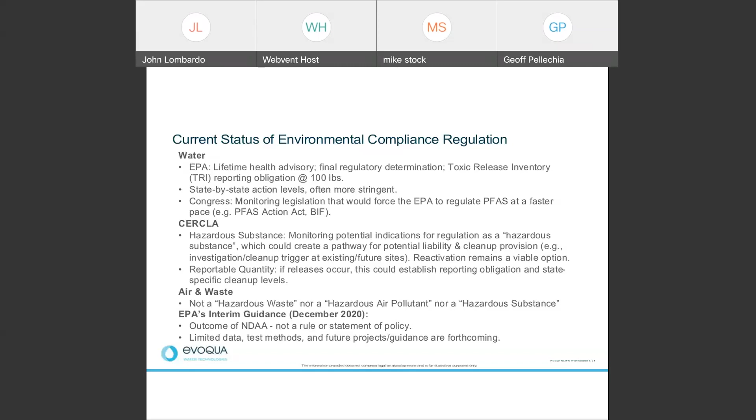All of these can contribute through exposure routes like occupational exposure, the drinking water, atmospheric transport to contaminated food products, which over time can contribute to adverse health effects. One of the largest studies conducted for PFAS was the C8 health study in 2005 to 2006. This study looked at human blood serum and was performed on a population of about 70,000 people who were affected by contaminated drinking water that had PFOA, or better known as C8. The study focused on 6 water districts across 2 states.

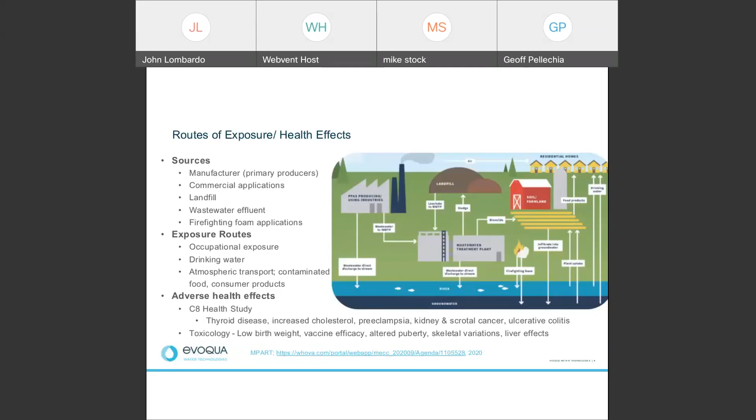So now I'm going to pass it over to John Lombardo, and he's going to discuss solutions and then show some case studies. Thank you, Geoff. My name is John Lombardo. I'll be covering, as Geoff said, some solutions and case studies on PFAS as we go forward.

So as you see now, there are different methods for removal solutions, right? So there's basically classifications of separation, which would be our granular activated carbon or granular activated carbon in general, and ion exchange, which separates the PFAS from the water. They're capture. They actually capture it and adsorb it. Membranes are separation, which physically separates it.

So in the case of membranes, you get basically an effluent stream or a permeate stream and a concentrate stream. The permeate stream is contaminant free for the most part, or is much lower in contaminant concentrations. And the concentrate stream is actually highly concentrated now with those contaminants. That's the separation piece of it. Carbon and ion exchange are basically adsorption or capture. They both work on the adsorption principle.

Granular activated carbon is named best available technology by EPA for organic contaminant removal. It does remove other organic contaminants as well as PFAS, so it's very good at removing halogenated compounds from water, PCE, TCE. It's good at removing other things, maybe from gasoline that's gotten spilled in the soil as well. It's a very minimal maintenance operation. There's not a lot of moving parts. It's just a flow through, pump and treat, if you will.

Single pass ion exchange uses a resin bead, a plastic resin bead, to accomplish the same thing. It's actually a combination of adsorption and exchange. It runs at a lower empty bed contact time, EBCT, than granular activated carbon. For carbon, the industry standard is about 10 minutes of empty bed contact time. For ion exchange resin, it's typically in the 2 to 3 minute range. So you can run it at a higher flow rate, and usually it requires a smaller footprint

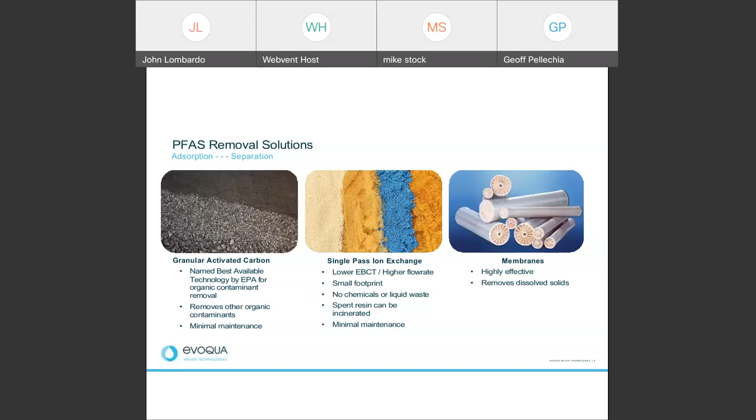So how does granular activated carbon work, or why does granular activated carbon work? Granular activated carbon is really a very highly porous media which has a tremendous surface area. About 1 teaspoonful has enough flat surface area to cover a football field if you could spread it out. So remember, that's just a flat surface. There's really no depth measurement in there, but on a square footage. So it's an extremely porous and highly surface covered area.

And in the diagram you can see on the top right, which is a depiction of a granular activated carbon grain, there are basically 3 types of pores. There are macropores, which are the largest pores. Then there are mesopores, which are the medium pores. And then there are micropores, which are the smallest pores. Well, adsorption takes place in the micropore zone of the carbon.

So the contaminants that you can see there in the green and the other, I'll say purpley red ones, work their way through the macroporous structure of the carbon, then transport using the mesopores down to the micropores. So the contaminants are then stored in the micropore section of the carbon.

So all carbon is not created equal. It all depends upon really the raw material and the activation process. The performance is determined by the porosity and what we call the surface chemistry. The best thing is to know that on an individual water source, you are matching the best type of carbon for that particular solution. Some carbons are more microporous, some carbons are more meso or macroporous. So knowing what is in your water really is the best way to determine the best type of carbon. There's really not a one-size-fits-all approach in this type of operation.

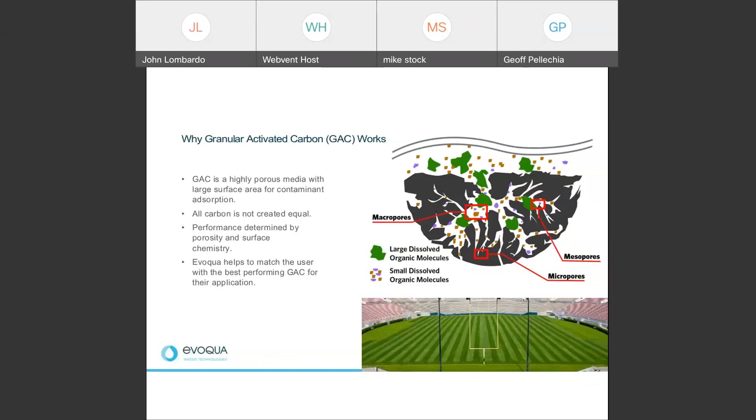So how does ion exchange work?

So ion exchange is in essence a plastic resin bead, and it's based on the principle of exchanging a harmless ion for the contaminant. So if anybody is familiar with softeners for home, where you're exchanging calcium and maybe magnesium for sodium, that's the same type of principle, but it also works on adsorption. So after the contaminant, kind of the green globules that are there in the diagram, are exchanged on the surface of the ion exchange, it absorbs into the structure. And in this process, we're exchanging chloride as the ion exchange for the contaminant.

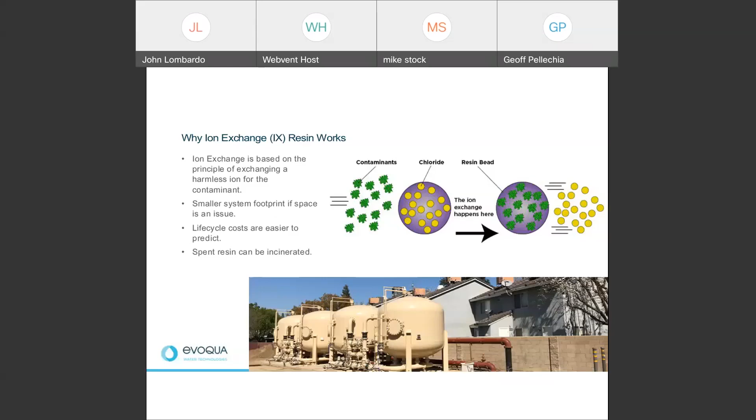It requires a smaller footprint, so if space is an issue, ion exchange may be a more attractive option. The life cycle costs are a little bit easier to predict, whereas carbon is a grain, really. It has a very rough look to it. The resin beads, in this case the ones that we use, are relatively uniform in particle size, so it's pretty easy to predict absorption and different things. And the spent resin, once exhausted, can be sent off for incineration.

And they're a good measure because they take into account seasonality, fluctuations, and different things that go on. So if you have a surface water, which is prone to turnover, whether it be lake water, pond water, or any type of surface stream or river that you're drawing from, piloting is a good way to take into account seasonality. As leaves fall, if you're in the northern part of the country, they fall into the water, and you have animals, runoff, rain that collects in there. It might be a better option for you.

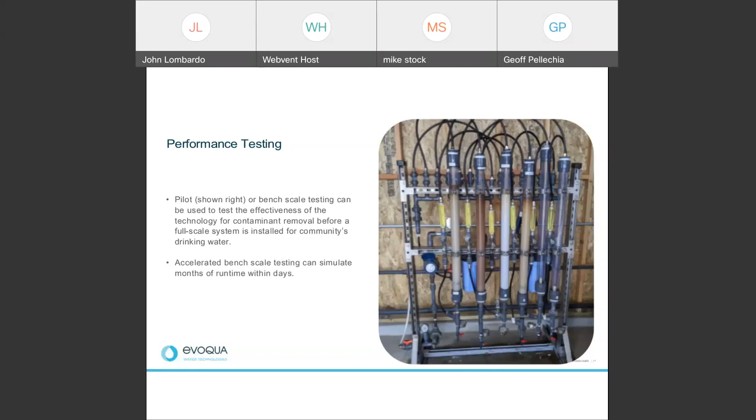The one disadvantage of the RSSCT is that it's a snapshot in time. You're taking a sample, usually a drum of water, so a 55-gallon sample, and using that as your basis. Now, if you have a groundwater source that's pretty stable, then it's a pretty safe assumption. So there are pros and cons on each one: length of time, testing, cost, availability, other things. This all goes into determining the best way for the municipality, utility, or whoever the user is to benchmark their performance and what they would expect in a full-scale system.

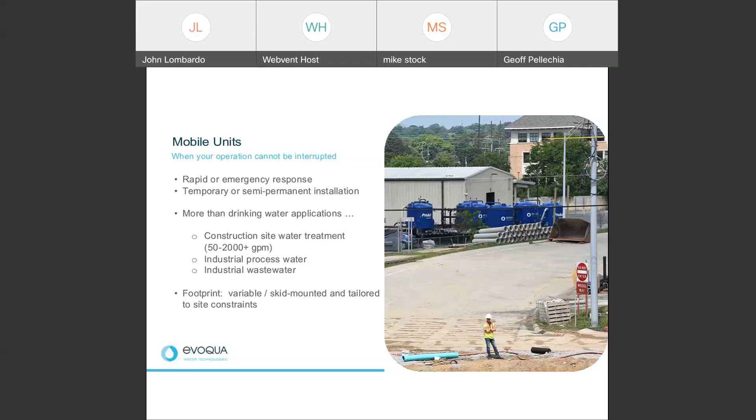It can be done for industrial process water and industrial wastewater as well. There are variable footprints based on size and constraints, and some of the equipment may be skid mounted or trailer mounted to make it easier for you to operate on your site.

Now I'm going to cover some case studies. The first case study that I'm going to cover is actually from a lakefront development in Western Michigan, where they were doing, once again, construction, and when they hit the water and tested it, they found that the water inside that construction area was contaminated with PFAS and metals and other things.

So in order to basically treat that, Evoqua mobilized some trailer equipment and some frac tanks and other things to go on the fly treatment. So it was kind of a real pump and treat. They were taking the water out, treating it for metals removal, and then treating it for PFAS removal, and then discharging. The city, in this case, set the treatment goal to non-detect.

So that meant that they wanted the effluent in the PFAS to meet the current detection limits of the analytical, which right now is about 2 ppt or less. In this particular instance, the treatment goal was met throughout the entire project, which lasted about 6 months during the construction cycle. So it was a very simple, but yet very effective solution.

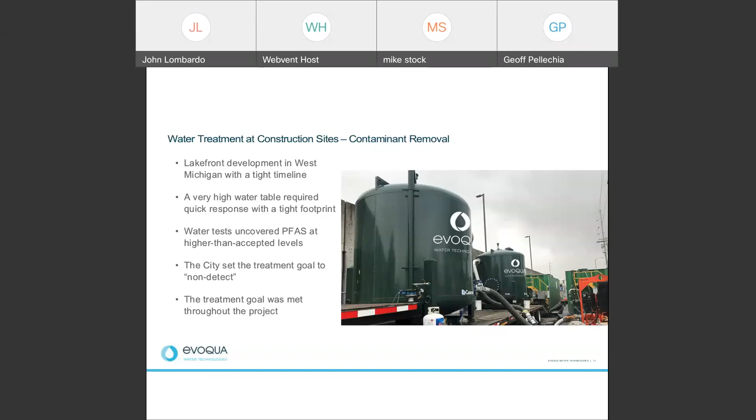This is another site around the corner, same type of thing where they were doing some digging for construction on a highway, and the water tested positive for PFAS, and they had metals and other inorganics in there that needed to be treated. What they decided to do was drill a wellhead in there to pump it out. And as they did that, they mitigated for PFAS, arsenic, mercury, and other. And in this case, the treated effluent was discharged into a municipal sewer.

So all sorts of solutions. You can see some of the equipment back on the right, multiple tanks, frac tanks, other things that are there that can be used in a combination to be able to treat effectively and discharge water within compliance to the local standards.

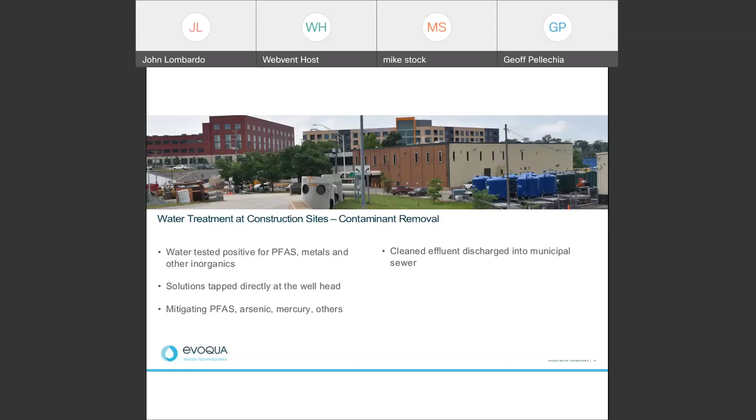This is a temporary system that was installed in Colorado. It was an emergency solution to mitigate some seasonal taste and odor issues for a municipality. They were struggling with some MIB and geosmin, methylisoborneol and geosmin issues in their water, imparting taste and odor. And the municipality had plans to put a new treatment facility in, but it would be years in the making between the design, the implementation, the permits, the funding, the whole 9 yards. But they needed a solution before the warmer weather came and tourists and others started arriving on the scene.

Evoqua ran an RSSCT, rapid small-scale column test, on the water to determine that the right GAC was used and that it would remove the MIB and geosmin to acceptable levels and treat for a certain length of time, so that they could use this system temporarily during the summer so that they could then continue on with operations.

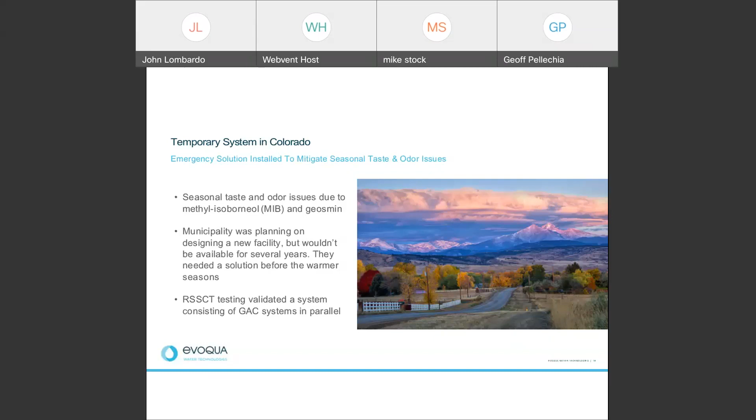Another one is Kennebunk and Wells Water District in Maine. Years ago, they had just developed a new well, and when they were doing the well testing as part of the UCMR3 rule back in 2016, they discovered PFAS in the well. So they piloted several types of carbon to determine which one performed best based on their local water chemistry. In this case, results showed that Evoqua's enhanced coconut shell carbon provided an additional 3 months of full-scale runtime versus other carbons.

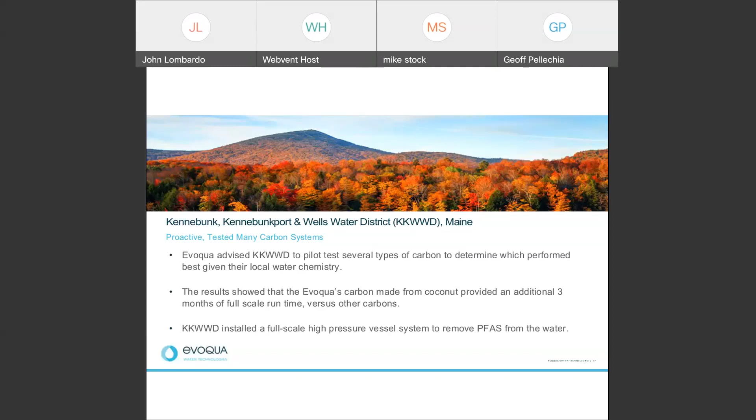You see the line up at the top at the 10 was the influent for PFOA. This is just one of the contaminants. And you can see that we ran some regular coconut, some bituminous coal, and then our CX enhanced coconut carbon. We ran the virgin, which is the yellow line on the bottom, and then a react, which means it had gone back for reactivation and come back to be reused. And you could see that the react and the virgin outperform both the standard coconut and the coal.

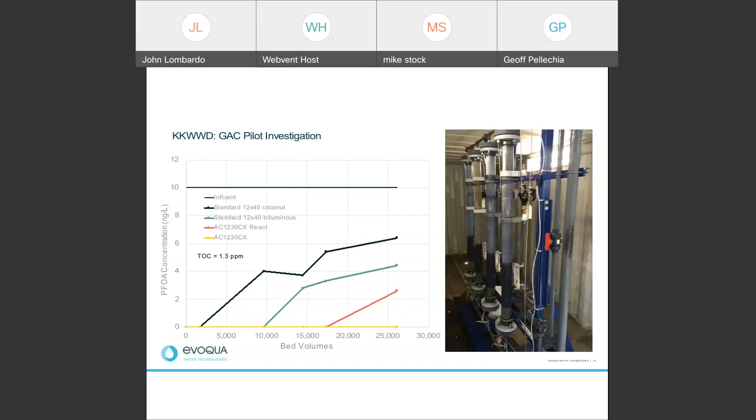So they installed a permanent solution. They had a sand filter put up front, and they put a little bit of chlorine in it to remove iron. And then they used a lead lag operation with GAC. So it was worker polisher or lead lag. They're 12-foot diameter vessels. They are 20,000 pound adsorbers. So that was the volume.

But because of the lower density of our CX media, they only filled both of them with 34,700 pounds. We designed it for the 10-minute empty bed contact time, but because of seasonal operation, they were running closer to 8. It was originally an outdoor installation, and they did what we called custom segregated municipal react and return. So they had this carbon, they'd send it back to us in our NSF 61 kiln at our Darlington facility. We would reactivate the carbon, make up with fresh virgin carbon, and send it back to them for further use.

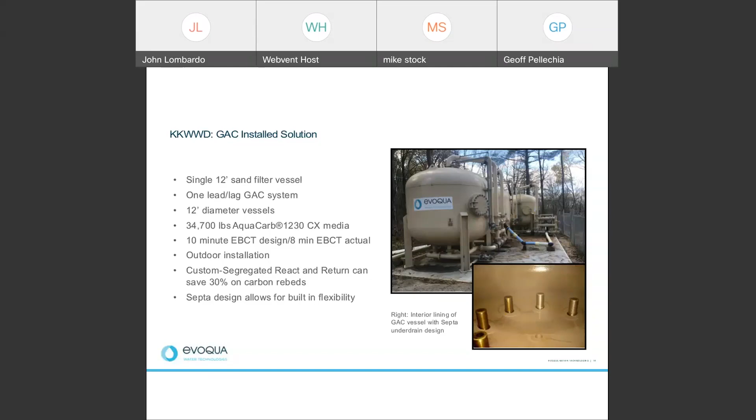The goal of the municipality was to get the system online in time for the tourist season, and they basically said that they have had no problem with it. And the overall impact to the ratepayers was 3 to 4 cents a day, and that'll take years to come in until after they get everything settled. And it kept them independent. It was cheaper than buying water from another municipality close by, and allowed them to continue their operations and kind of control their own destiny.

Another case study, this is in the Southeast United States. It was a groundwater with high TOC. It had been under influence from PFOA and PFOS. They were really unsure of the source of the contamination. The concentrations were above the LHA, the EPA Lifetime Health Advisory Geoff had discussed earlier. The opportunity was brought to Evoqua through an engineering firm. The water had high TOC, it was about 14 ppm. Their treatment objective was to get PFOA and PFOS under 10 ppt. The pilot, which you can see over on the right, was done on both GAC and ion exchange resin.

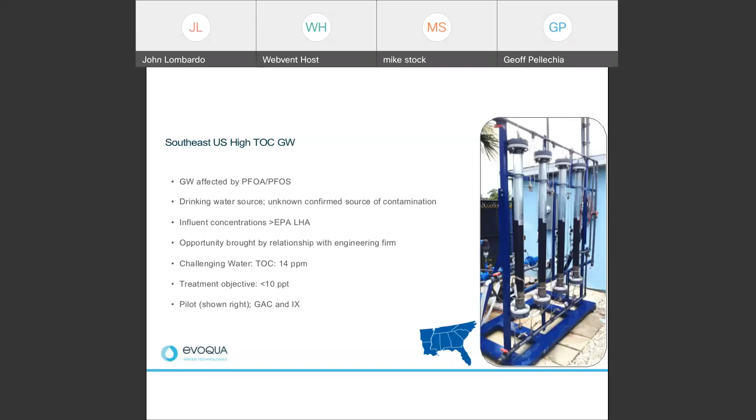So the initial results were putting carbon first, and the carbon, because of the high TOC, fouled within 3 days and had to switch over to ion exchange resin. So once the ion exchange resin was put into operation, the resin turned black within 24 hours, but yet it still provided sufficient removal and no pluggage. It operated superior to the carbon in this case.

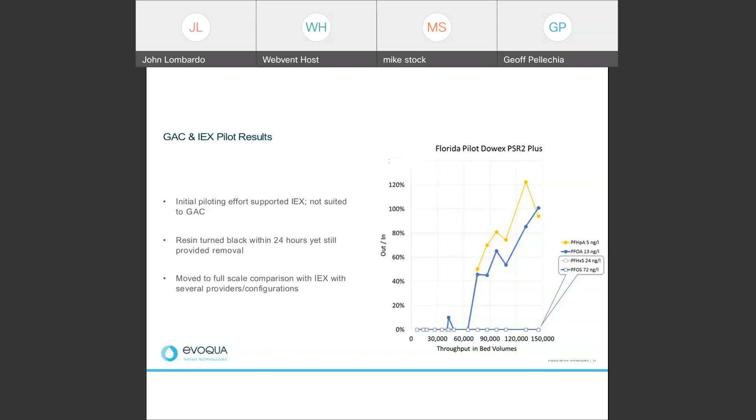The engineer and the municipality decided to move to a full-scale comparison with ion exchange from several different manufacturers. And you can see the results down there. Evoqua chose Dowex PSR2 Plus as the resin. And you can see how the performance was on several of the long and short chain contaminants. In the full-scale study, they used 4 different resins. The vessels had the SEPTA design that we covered in an earlier slide to provide greater flexibility for operation. In this case, PSR2 Plus seemed to provide the longest throughput, so the customer ended up rebedding with PSR2 Plus going forward. Basically it treated a greater volume of water before exhaustion.

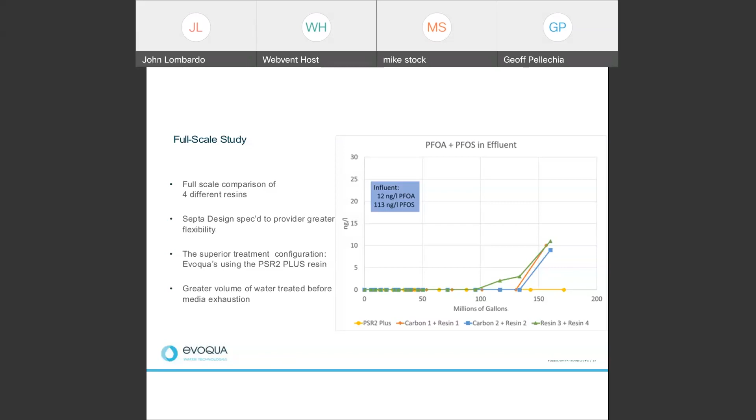I'll turn it back over to Geoff for the wrap-up.

Thanks, John. And I think we just learned the value of a single source provider of emerging contaminants. We offer unbiased technology in a portfolio of comprehensive solutions from start to finish. So with that, we're technology agnostic. We are solution providers and try to design the system that best fits your needs. We can rapidly deploy mobile assets to your facility, for example. We can offer treatability studies to help identify the best available technology that's out there today.

We can offer the permanent on-site solutions, which you saw in some of these case studies as well, and employ a dynamic servicing network able to be on site in most of the US within 2 hours. And our reactivation services to help regenerate the carbon. And finally, our knowledge of disposal options to help you see the end. So it's really start to finish here.

So what are the next steps? The next steps would be: let's assess the risk, determine the regulatory requirements, understand any public concerns and brand protection, and obtain some background water quality and PFAS analysis. The water chemistry is very critical when we're designing a system. So we really need to understand what we have coming in and what we need to treat to.

Determine if there are any remedial alternatives, and understand the life cycle costs of the system. We can look at whether there are any destructive technologies available and what the disposal options are. And lastly, decide what type of upfront site-specific testing methodology, whether it's a pilot or an RSSCT, as John went over earlier in the case studies and the examples.

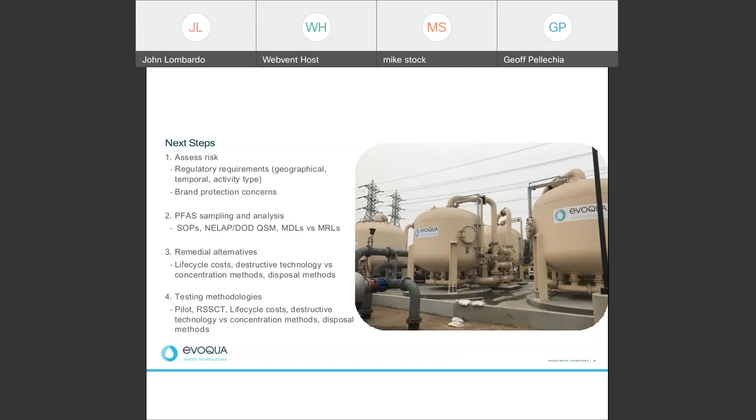So in closing, your water is unique, and we can determine a customized solution just for your community based on the local water conditions. And now it's time for some questions.